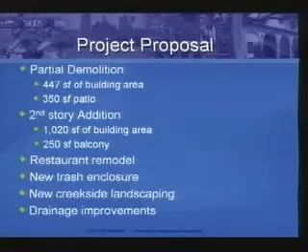This project is related to the Cabrillo Bridge replacement project, which I'll describe momentarily. Required applications are 2 front setback modifications for encroachment into the 20-foot front setbacks on East Cabrillo and Helena, and a coastal development permit.

For some background, the Cabrillo Bridge project was reviewed and approved by the Planning Commission back in July 2007. That project included the partial demolition and replacement of Rusty's building in its same location to facilitate replacement of the structurally deficient Cabrillo Bridge. The project also included replacement of the channel walls below the bridge and a rebuild of the Mission Creek banks as part of the Lower Mission Creek Flood Control Project. The project also included right-of-way improvements, including sidewalk on the frontages of the subject properties.

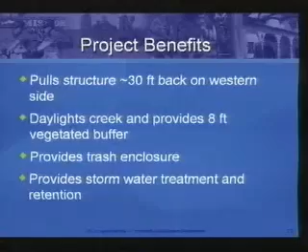Staff believes the front setback modifications to be appropriate due to the existing encroachments, the HLC support of this design, and because the project facilitates bridge replacement and the creek project.

As outlined in the staff report, staff's position is the project is consistent with the policies of the Coastal Act and the local coastal program, including water and marine environments, locating new development, and visual quality. So staff therefore recommends that the Planning Commission approve the project subject to the conditions in Exhibit A and making the findings in Section 7 of the staff report. And that concludes staff's presentation, and we're available for questions.

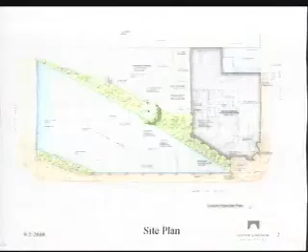Thirdly, when we put the second floor right here, we will be required to have an exit on this side of the building. So we will also be creating an agreement to have an emergency access easement out to State Street along that property. Also, we've been able to add additional landscaping in this little triangular area.

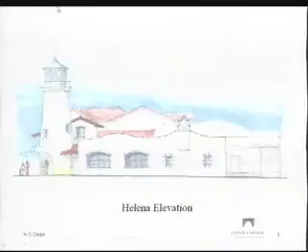This is the elevation at right angles to Cabrillo. At the HLC, there was concern that the tower is not historically Spanish, and there were even comments to get rid of it entirely. But Alex Bugeaud was very insightful and persuasive when he said, this is a folly, an architectural folly—we shouldn't be so serious about our Spanish architecture. And that seemed to win the day.

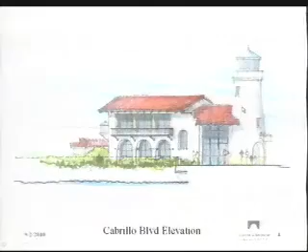The one thing that is disappointing about the tower is the small and awkward opening at the base. So what I have done is introduce a new, more elegant entry at the side of the tower that walks into a 1.5-story volume with a stair and balcony beyond. This volume was very important to the HLC because it hugs the tower and integrates it better with the new massing.

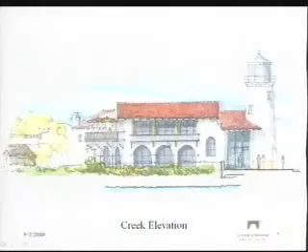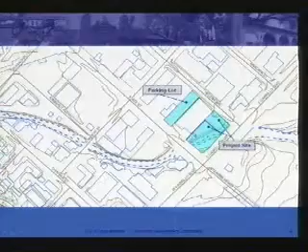And then if you maybe go back to the site plan—I'm sorry, I forgot my pointer. I'm sure it's tormenting a cat at home with one of the kids, probably. But... why, thank you, I have to learn how to use it.

On the revegetated area between the unused parking lot and the creek, that line you see coming off of the parking lot—would that line, before the vegetation starts, be equivalent to where the hardscape stops now? So the parking lot itself would continue, and that line would roughly represent where the hardscape is now, and then the vegetation would start? That's my understanding.

Okay, thank you. Mr. Chair, if I may add, that little triangular space is additional landscaping. Thank you.

I have just a couple of quick questions on phasing, implementation, and the funding contractual end of this. Does the Rusty's revision need to occur prior to the bridge? Is it handled as one simultaneous project, or separate contracts where the Castagnolas are paying for something on their building and being reimbursed, or is it all being put out to bid by the city? I'm just trying to understand how this interplays with the bridge construction.

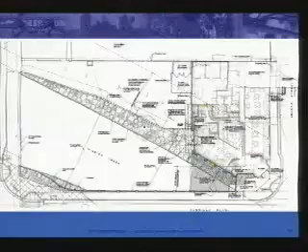Commissioner, Richard Six will address that, but we already added a triangle, and then Richard can speak to adding landscaping beyond that. Yes, Plan Commission, Commissioner Lodge, we are anticipating some shade trees in the palette and so forth in that area to soften that area. So I think it's already in the plan. I think you see a graphic of a larger tree in the middle there. That's an architect's estimation of where it would be, but we have a qualified landscape architect to pick the species and so forth. So we are anticipating better screening of landscape-wise.

Well, that will certainly help. I was thinking of a space that's over against the beach house building. Oh, I understand. Where the direction of the parking spaces changes, and there's a leftover space that would help. Yeah, it's right there. A tree there would make a big difference.

Any further comments? It's really not our purview, but I was thinking of the fenestration in the tower, like the courthouse tower where there's grill work over it. That would give more of a Spanish feel, if that's something the owner of the property might consider.

Thank you, Chair Bartlett. I remember looking at this in 2007 when the city was contemplating the bridge replacement project. There was a big empty question mark on this particular spot, and the commission at the time, and certainly I, wondered, what's going to happen there? City staff didn't have an answer at that time. It was kind of, well, we're going to work it out and just wait and see. And my imagination ran wild.

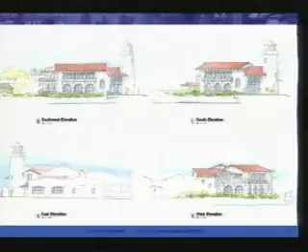We've had various discussions about creating new landmarks in Santa Barbara, and for better or for worse, maybe this is not the courthouse tower, but it's also not Santa Claus on Santa Claus Lane. It's a little campy, but it's there and people are familiar with it. It marks the entrance to the building, and I'm glad that you're keeping it in all of its unique glory. If you want to put grill work on it, maybe that would be good, but I'm glad you're keeping it, and I like the project.

Great. Thank you very much. Ms. Larson. Thank you, Mr. Chair. I used to eat a lot of crab and shrimp Louis there back in the day.

And I recall fondly the discussions over the lighthouse tower when it was first constructed, and how surprised everyone was. I'm happy to support this project, although it's kind of a what-you-see-is-what-you-get project because of the circumstances. But I think Mr. Six has done a great job of putting all these moving parts together in a way that really does work, and I'm very appreciative of that.

Let's see. It was a difficult site, and this is one of the ones where design is problem solving, and it's been well applied. If there was a line in the sand ever drawn, it was when that building was integrated into the bridge. So we do have to remediate that situation one way or another.

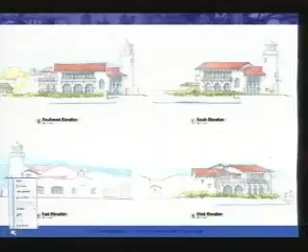So I would ask that the tree be a species that doesn't block, and I agree with the idea in the resolution of the construction hours for Fridays of a 3-day weekend, really making it a 4-day weekend, because we do have people pouring into town. And I think that's about it.

I'm glad you're not losing seats. In a perfect world, we could get a creek setback here increased, but at what cost? It's really difficult. I kind of thought of it as overhang plus setback equals, so that the negative gets counted as part of the increase. Because if you're overhanging by X and then pulling it back by X, that could be added to Y over here, and you'd have a feeling that, yes, we have pulled back into a setback by getting that cantilever out of there. So I'm hoping I can have that in my conscience about it.

So those are my comments. I understand the difficulties of the site, appreciate the architect and the architecture that's gone into this and the careful thought, appreciate the sensitivity of the owner, because believe me, it's difficult to have any property down there, and dealing with all the agencies and trying to get something that can satisfy everyone speaks to the owner as well. And the city, the government, the feds, the owner, the architect - I'm just going to say, good job.

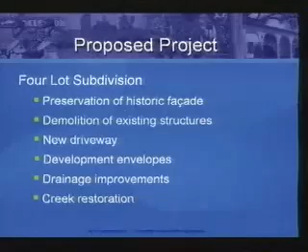The applications you're considering today are for 3 public street frontage waivers and 3 street frontage modifications. Those are for the back 3 parcels, along with a tentative subdivision map.

A historic structures report was reviewed and approved by the Historic Landmarks Commission. That report concluded that portions of the existing residence are eligible for a structure of merit. Those elements are the architecture and the street presence of that structure. So the project retains the south facade of that structure, the curved staircase, and the east elevation entrance. Also, a view corridor is provided from San Remo Drive, and historic documentation to city standards would be provided as well.

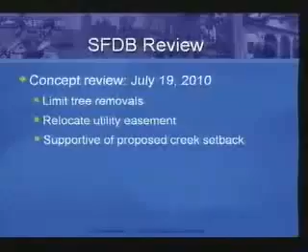The portion of the existing house that's historically significant is, at its closest point, about 35 feet from the top of bank. The applicant is proposing development envelopes for all 4 lots to match that and be 35 feet from the top of bank. Staff is recommending a larger setback where possible. It's not possible at the location of the historic building, but it would be on the other lots and the remainder of that lot.

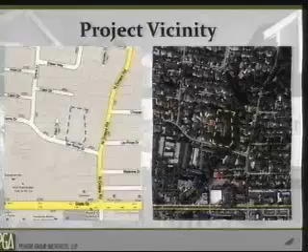Dan's done a fine job of summarizing the project and showing you the location of the property, and I'm just going to go through some of our slides and give you our perspective on the proposal.

This shows the site as you went out, where you were able to see the location of the existing house, the garage with the apartment, a shed, the existing top of bank, and the driveway that's along the existing bank.

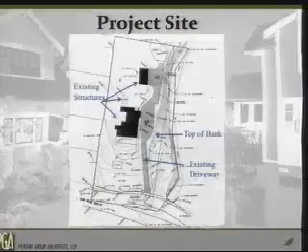The site is about 1.5 acres, with single-family use and detached structures. The zoning allows for 7 units on the property, but given the configuration and the desired design by the applicant, they sought only 4 additional units.

As Dan indicated, it's a tentative parcel map with 4 parcels. The building envelopes on the lots range from about 3,200 square feet up to about 5,300 square feet. There will be 2 covered parking spaces for each lot plus a guest space, since we know there's maybe some challenge parking along San Remo.

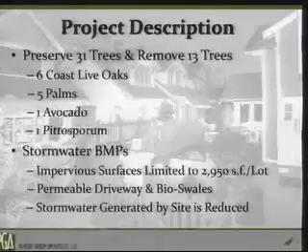We've also incorporated a permeable driveway with pavers, and there are bioswales on 3 of the lots that clean the water as it travels east and ultimately down to the street and into a storm drain. With the development of the site and the improvements being made, we reduce stormwater leaving the site during a 25-year storm.

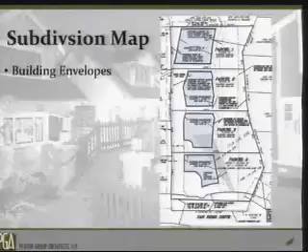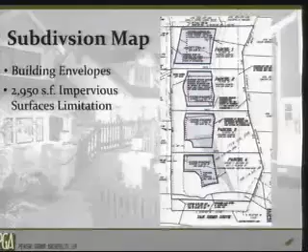Here's the subdivision map showing the layout of the lots, and the building envelopes as currently configured. This shows the additional constraints of the 2,950 square foot impervious surface limitation, and gives you an idea of where the view easement is.

That's from San Remo, and the idea is to preserve this sloping landscaped area and the facade of the building.

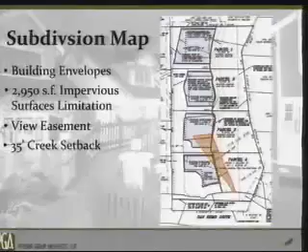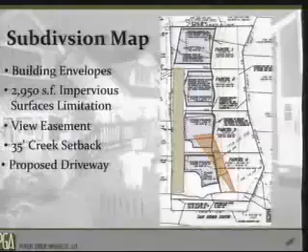Then we show the 35-foot setback proposed in the green line here, and the proposed location of the driveway. This was also something we spent a good deal of time talking about—do you move the existing driveway over? We saw a lot of merit in moving the driveway to the west, because that allows for the restoration work along the creek, and also creates a buffer between the neighbors directly adjacent to the property and the future residential uses on this site.

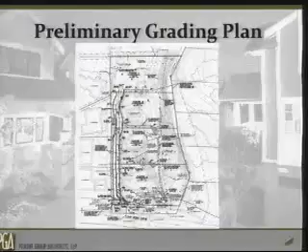So this is just the preliminary grading and drainage plan, which we can come back to if you have any questions about some of the drainage improvements.

For historic preservation, as Dan mentioned, we went to the HLC and there was a lot of interest in preserving the Edwards Plunkett design, which we've done.

At the Single Family Design Review Board, there was discussion about the lot orientation as well as the creek setback. While I didn't attend, Mr. Pikert did, and there was a fair amount of discussion about the adequacy of that setback. They felt that given the environment the project was in, the surrounding development and setbacks in that area, as well as the applicant's proposal to restore the creek, the 35-foot setback was sufficient.

They also asked us to preserve trees until construction was started, and I don't think the applicant has a problem with that.

With creek restoration mitigation, as I indicated, the applicant is proposing a 35-foot setback, removing the existing development within that setback, which includes the existing driveway, the garage, and the apartment unit.

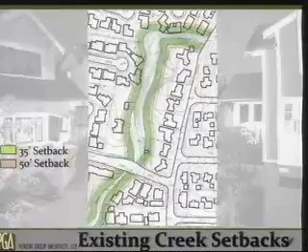In staff's report, they make a recommendation for 50 feet, and they have several points they use to support that recommendation, and that's one thing we wanted to talk about. We want to talk about each point they make and how that relates to this particular property and this particular proposal.

So one question we have is, does the project create water quality impacts? Because that's one of the points they make, that it would improve it. Actually, through the best management practices used as part of the stormwater management, the project reduces runoff in the area. Runoff leaving the site now is greater than it will be once this project is built. All the runoff leaving the site will be cleaned, which isn't the case today, and no direct runoff will enter the creek. So there aren't any water quality impacts associated with the project that would necessitate an increased setback to mitigate those impacts.

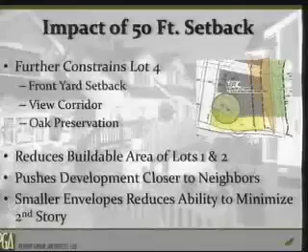It reduces the buildable areas of Lots 1 and 2, which I'll show on a graphic subsequent to this. It also causes us to move the development closer to the west. One of our goals was to find a balance between creating this buffer on the west as well as creating an adequate creek setback. Through the design and discussions, I think we achieved that balance.

The other impact worth considering is that the smaller we make that building envelope, the more constrained we are with how we modulate the mass. The idea is to have an envelope large enough that the footprint can be a larger size and the second story a bit smaller. So the smaller the available footprint, the more mass you might see on the second story.

You're over 16 minutes at this point. I'm getting close.

So this just gives you an idea of what the additional constraint would be. This dashed line represents the 50 feet. One thing I wanted to note is that at the site visit, which I unfortunately missed, there was some discussion about Lot 1 and its size. I think we probably should have shown that there's going to be a driveway and turnaround area on that lot, which creates a smaller buildable area than one might first think.

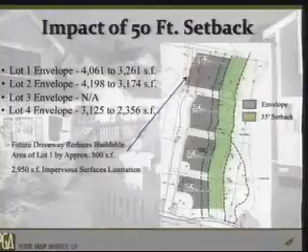If the 50-foot setback were applied to Lot 4, it would actually make that buildable lot envelope area smaller than the impervious surfaces limitation currently applied to it. So you can see the changes in the buildable envelopes from now to a 50-foot setback.

In conclusion, we think we've worked hard to design a subdivision that both respects the creek and respects the neighborhood, and believe the efforts to restore San Roque Creek will be beneficial to the area and the neighbors. It increases the setback on the site. We think it will enhance the neighborhood, and we know that right along San Remo there's varying types of development, and this subdivision will fit in nicely with some of the existing single-family development there.

It's going to provide a few new housing opportunities, which I think are always appreciated in Santa Barbara. And as required, it's going to contribute to the Inclusionary Housing Fund, which will hopefully go towards building more very low-income housing.

So this concludes our presentation. What we're asking from the Planning Commission is to approve the subdivision with the proposed 35-foot setback, as well as the lot front modifications and the frontage waiver. I'm happy to answer any questions, or present any of the additional slides.

Great. Thank you for being very thorough as well.

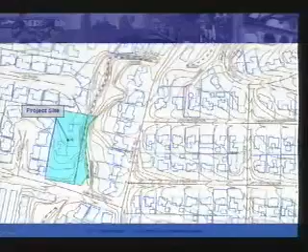Well, if it's been in the Madsen family for so long, it would make sense that it would stay in the state it is up until this point. Let's see. I think that's it. I'll come back if I have more. Thank you.

Thank you, Mr. Jostes. Ms. Jacobs, do you have any questions? Thank you, Chair Bartlett. I don't really have any questions at this point, except that given the Edwards and Plunkett house and the proximity to the creek, I would have expected a mitigated negative declaration, and I'm surprised there isn't one, but I'm sure staff has their reasons for not pursuing that environmental review.

In terms of historic impacts, the applicant incorporated all of the recommendations from their historian prior to that report being accepted by HLC, so their project reflects what the historian's assessment is. Their project description includes the preservation of those areas. So the historic structures report concludes that it's a class 3 impact, and it's not actually mitigation, but actually part of the project, that those things are preserved.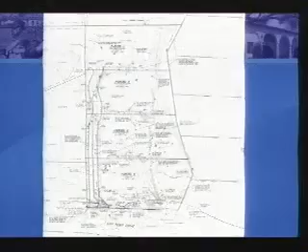When I'm standing on the sidewalk looking up that view shed, what am I looking at right in front of me at the sidewalk level? Is it a continuation of the block wall? There'll probably be a wall that encloses the property, but it has to be a certain height so you can see over it essentially. Then what you'll see is native understory plantings that would survive nicely under sycamores or oaks—and that's where the existing driveway is, which will eventually be ripped up and replanted with that vegetation.

The mitigation monitoring and reporting plan could be 5 years, could actually be longer if some goals aren't met. What's the dynamic for, if this is 4 parcels and they're individual parcels, ensuring that it's actually funded for 5 or 8 or 9 years or whatever it takes? I think that will have to be addressed in the CC&Rs developed for this subdivision, with the mitigation and monitoring funded by some kind of homeowners association that they'll have to form.

Or some agreement between the property owners, because there's the path that all of them will be responsible for maintaining, and a driveway that they're all responsible for maintaining. So whether it ends up being the applicant putting funding into an association bank account, or the property owners funding it, it's a condition that's got to be met and there'll be a financial mechanism set up for that. I think being part of some kind of homeowners organization was probably the most appropriate.

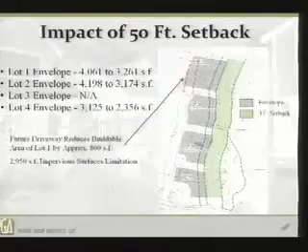Mr. Chair, I'm recalling our review of those citrus groves with our urban historian. We looked at photos from 1940 and 1952, and in 1952, those oak trees weren't there.

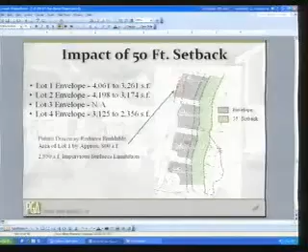And then even lot 4 is different for some reason. Right, but this is with... I doubt by the street it was 3125. Maybe it's just a typo. You know what, I'm going to have to look at that, how we came to that. Yeah, I'm a little puzzled by that. I'll take a look at that and come back to you. Okay.

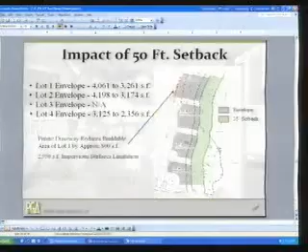Mr. Gullett, did the historic structures report really talk more about the street presence, how they define that? Is there a width or length along the street? Because the way that view corridor is aligned currently, if we extend it out, it also aligns directly with the huge sycamore tree in the island. So you're not going to have that view from the south side of San Remo, only on the north side. I'll look back to verify, but from my recollection it includes the view corridor we see on the plans, but it doesn't specifically analyze a width in the text of the historic structures report.

And then, either Mr. Cotto or yourself, I know we had some discussion at the site visit also about the height of all the hedges directly at the front right-of-way line relative to the temporary suspension of the current hedge ordinance, and some of the hedges would need to be removed for safety purposes when adjacent to driveways, but others might remain. Could you elaborate on what can legally be trimmed and what is taboo at this point?